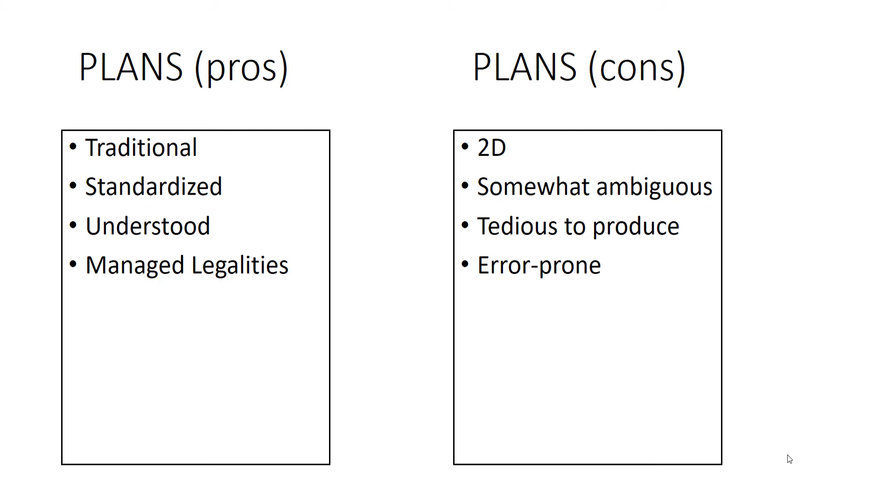The drawbacks of plans are they are two-dimensional. They do leave some ambiguity in place as far as what's to be done in certain specific areas. There's tedious and time-consuming work involved to produce construction drawings. There is the potential for errors to be made, moving between sheets, missing notes, missing call-outs, all the types of things that go along with it. But plans are, again, comfortable. They're tried and they're true, and we all know about them.

Models, on the other hand, are relatively new. We've begun to model things in three-dimensional space more commonly. It's becoming more commonplace. The pros on models: it's three-dimensional.

It really decreases, if not completely removes, ambiguity. Some of those details that happen between cross sections in a plan set, or in a high spot or a low spot, or some area on a grading plan become much more prominent, and we're able to see and evaluate those. It increases our spatial awareness.

We're able to see how things fit together. We're able to see how the drainage works with the roadway surface. We're able to see how the utilities under the ground interact with the footing of the bridge pier, all those types of things. And then another one I've put on here is the control of the design intent.

One of the things I thought of as I was thinking about this—a lot of times many of you may have been faced with this in terms of how things work. At least in my experience, contractors a lot of times will recreate three-dimensional model data from plans, which in turn sort of negates some of the design intent, potentially, in them reconstructing their model from your plans.

So being able to provide a model based strictly off of your design intent of what you intended to be built—that's important. The cons of models: the level of detail. We've all probably posed the question, well, what's in a model?

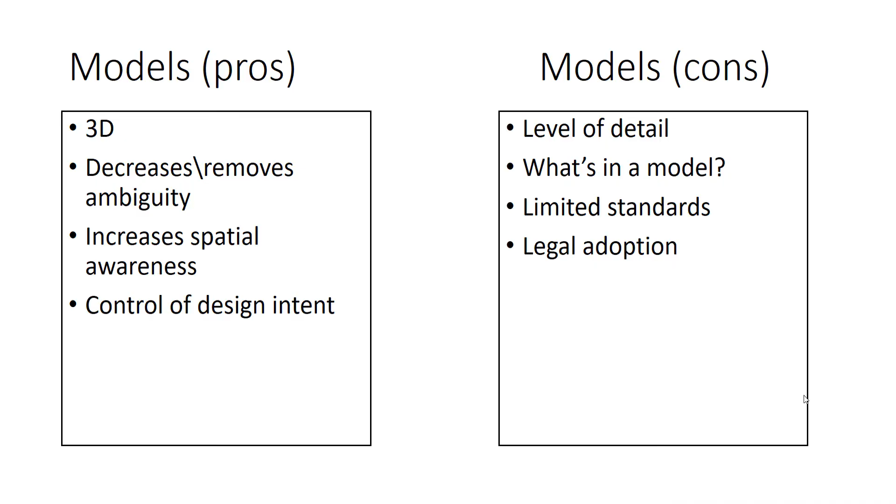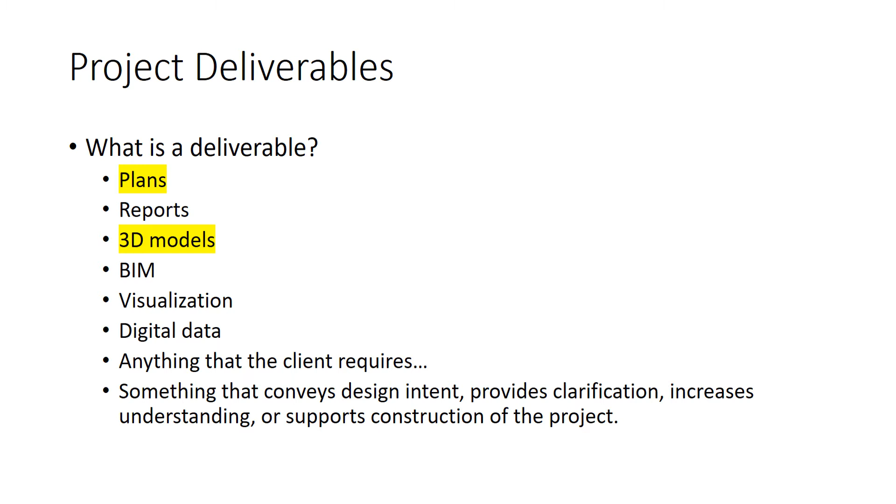We're focusing on plans and 3D models. But in terms of deliverables, it could simply be anything that the client requires. A deliverable could be considered anything that the client requires that conveys some design intent. It provides clarification of something on the project. It increases understanding of the project and supports construction. That's a deliverable. But in terms of this debate, what is your deliverable?

We're focusing on plans and three-dimensional models. Plans are our traditional default method for plan project delivery. They are understood, they are well known and comprehensible. Or is it three-dimensional models? Plans or models? What is your deliverable? And that may vary from project to project.

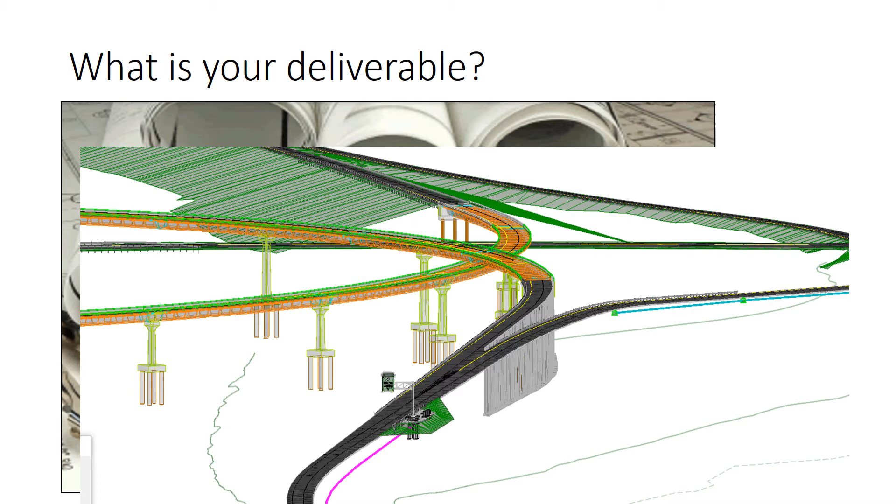Now, really the basis of this entire tech talk is, again, thinking about plans versus models. And I realized a while back that a lot of times our conversations, when we have discussions about plans and models, it tends to go one way or the other - either we're going to stick with plans and ignore models, or we're going to use models and forgo plans. As I began to consider that in reality, looking at this in light of what our objective is, to design and communicate our design most effectively, rather than thinking about plans or models, we really need to think about plans and models.

Because the constituency that we need to communicate with is broad and varied. We're all well aware that if you go to a public involvement meeting and try to display a set of construction drawings, a right-of-way map, whatever it may be, you have to explain that. So we need to produce deliverables, plans and models, so that we can satisfy a broader cross-section of people and interested parties. So in thinking about that, considering who are you talking to, I'm focusing here on the delivery aspect of our projects.

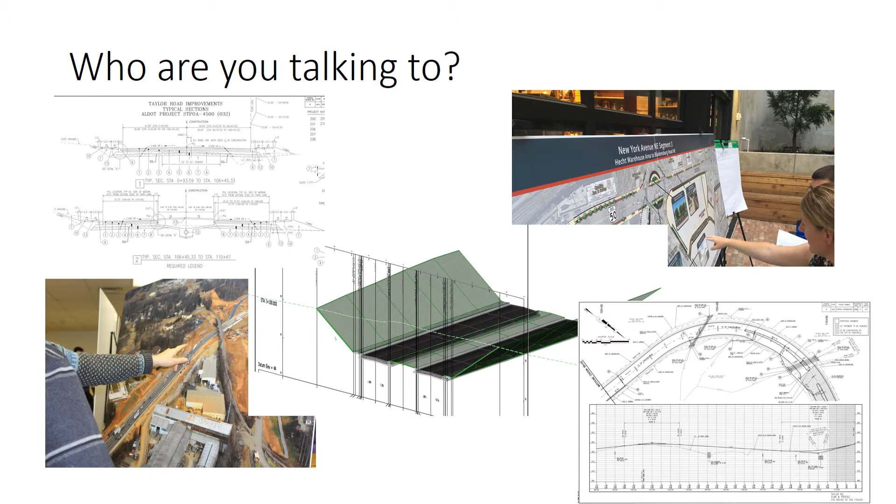Modeling, there's some legalities that need to be developed and created, but in terms of spatially defining things and clarifying what we mean to a broader set of parties, three-dimensional modeling allows us to do that. So when we think about who we're talking to, again, it's not just plans or models, it's really both to be most effective and efficient at communicating our design of the project to a broader set of people. So three-dimensional models enhance our ability to communicate and convey understanding, and ultimately this leads to the ability to enhance our delivery. And we're all focused on delivery.

But again, as we look at the changing environment in which we all do business, in which we all work, in which we all produce our projects, delivery of the project is key. That's our deadline, that's our focus. So being able to do that more rapidly, cheaper, faster, better, with less errors, that's important. That's the key. But the other side of this is, like I said, there's two issues.

There's the delivery of the project. How do we use plans to deliver the project? How do we use three-dimensional models in delivery of the project? What's the advantages of models in delivery? There's also the design side of this. In terms of looking at three-dimensional modeling, there's also benefits just in simply designing and creating and using a three-dimensional model within the design process.

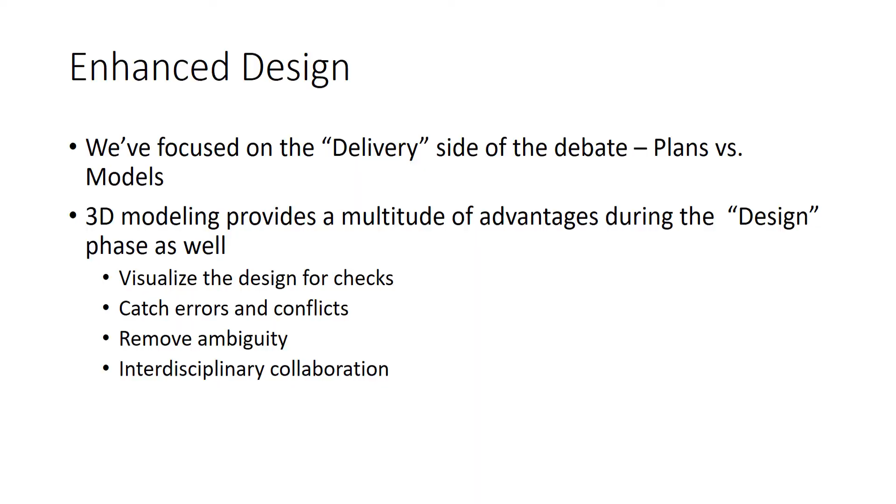So in terms of just thinking about the design, three-dimensional modeling, whether we talk about terrain models versus solid modeling, which we'll look at in OpenRoads Designer, provides a multitude of advantages during the design phase. Simply being able to visualize the design model, being able to collaborate between different disciplines, being able to see our existing utilities compared to our proposed drainage, compared to our roadway surface, compared to the box culvert at the creek at station 200+10, allows us to arrive at a better design, minimize errors, and remove ambiguity much faster in the design process. And that's kind of where OpenRoads Designer comes in.

And let me try to clarify where I'm coming from in thinking about our workflow and our processes. Again, in engineering, we design and we deliver. Well, in OpenRoads Designer, we wanted to increase the efficiency of those two things. What I wanted to point out here is that as you're modeling and designing, the model is being constructed continually. So rather than having a separate process of design, deliver, and having three-dimensional modeling as a separate entity that we have to post-process or some extra work, we want it to all be one, so that as we design, we are actually generating the deliverable three-dimensional model and the plans.

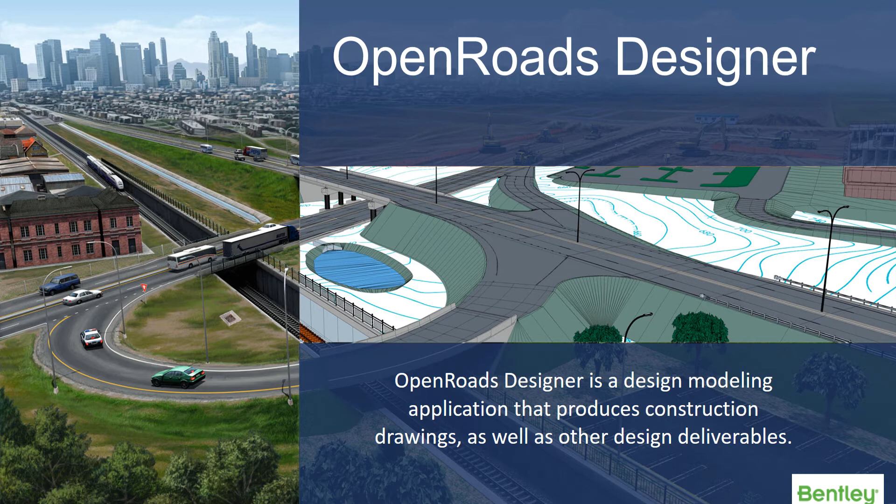So that efficiency, rather than being a multi-step process. And this is an interesting topic too: if you think about the things we've done in the past, we went through a lot of work creating terrain models, geometry files, templates, roadway corridors. How many files did we create, ultimately to generate the deliverable, which was drawings and some terrain model data? So again, OpenRoads Designer is intended to minimize that separation of files, separation of work, so that we blend design and the deliverable into one type of workflow.

So let's take a quick look. When it comes to OpenRoads Designer, if you haven't seen it before, it is a modeling application. It is intended to design and model in one comprehensive application. When it comes to plan production, and I'm showing you a cross-section image on the screen here, we provide tools named boundaries to actually provide windows into the design model. So rather than it being a secondary process to create some 3D data, then extract a picture of it and put it on a sheet, they are live, they are dynamic, they are intertwined.

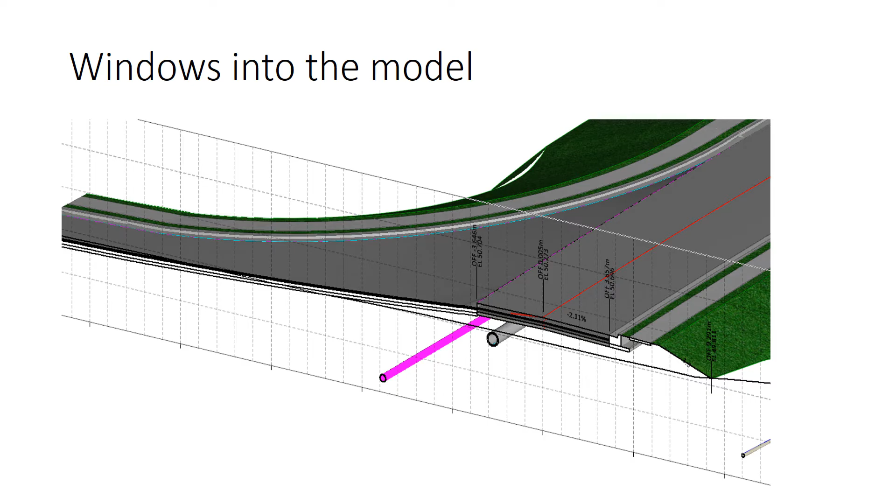Okay? In addition to that, again, marrying our workflows as a designer to produce both three-dimensional model data and plans in an integrated, more efficient workflow, we can look at civil cells as an example of technology included in OpenRoads Designer. You'll note here on the screen I've got just a typical detail of a sidewalk ramp, and then adjacent to that I've got the civil cell display.

So what this represents is a pre-built, predefined, parametric, constrained ramp constructed in 3 dimensions that follows the criteria specified on the detail sheet. So what you see in this example of a civil cell is the marrying of the data, the parameters, the specifications for that ramp into a 3-dimensional modeling element that we can store in a library and recall and use over and over again in a design.

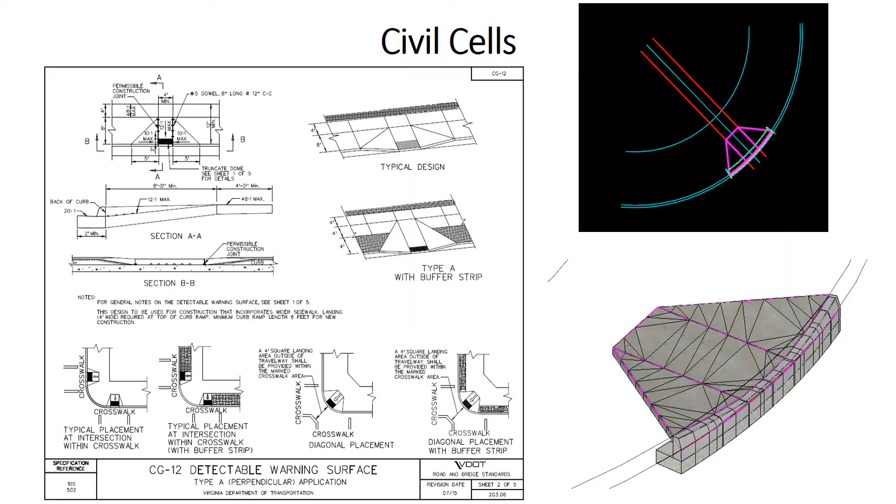Okay, I hope that makes sense. But again, it highlights the convergence of the plan specifications, which we've detailed out on the screen in the typical sheet we'd have, and the modeling element, which we'd use in our design model. All right, so let's take a look at OpenRoads Designer. So again, in context, thinking about designing and delivery.

So as we start here, I've got multiple views opened in OpenRoads Designer, and we're focusing first of all on just the modeling aspect. As I said before, when it comes to designing, being able to model quickly and efficiently is extremely beneficial, just simply to see what's going on. So what we're doing here, I'm just going to place a fire hydrant. I have an existing water line along the south side of the roadway, and I'm going to place a fire hydrant and tie into that existing water line.

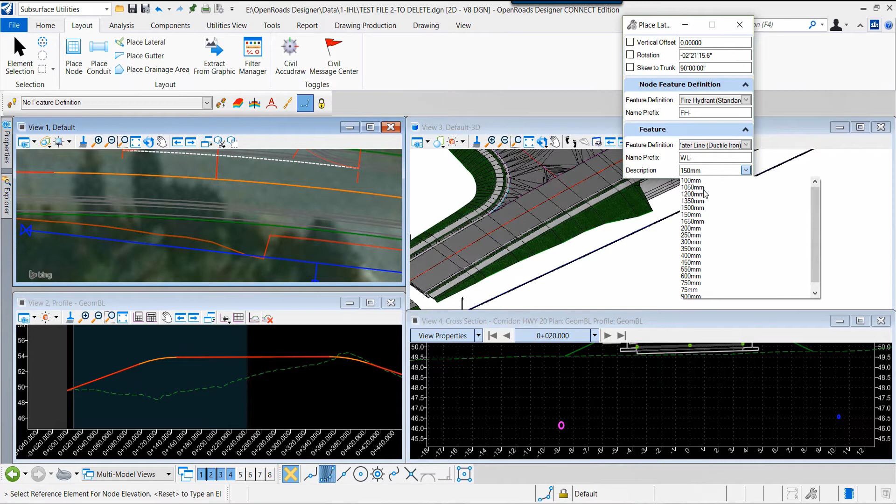Okay, so I'm going to go place a lateral. I'm going to select the feature definition that I want to use, which again is a fire hydrant. The feature definition basically defines what I'm modeling. And now I'm just going to tie that fire hydrant into an existing water line, which you see has just been referenced into my design model. You see it in the plan view on the left, and then you can see it in the 3-dimensional model view on the right.

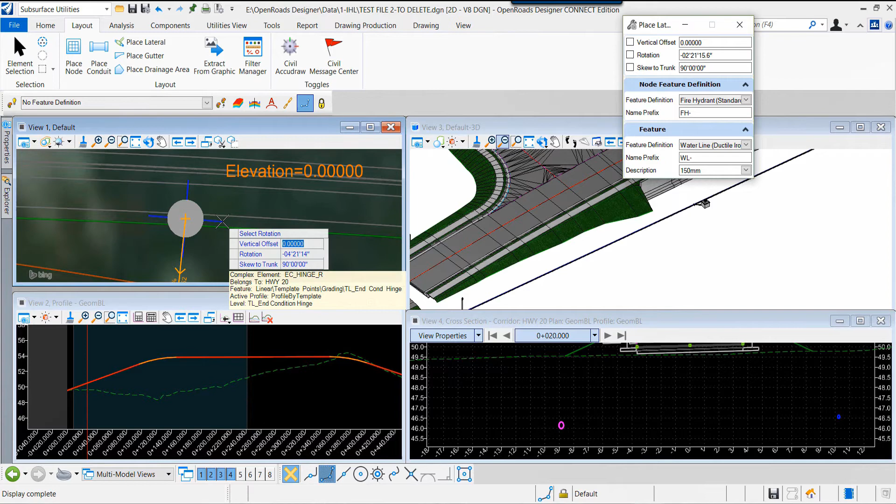So as I begin to place that fire hydrant, I'm actually going to place it in the 2D top view. Now I'm using sort of traditional methodology here in placing that element in the 2D view, but notice it's being constructed in the 3D view. And again, this really shows that convergence that we wanted to incorporate in OpenRoads Designer: work traditionally, produce 3D. So that 3-dimensional model is just there, it's inherent, it is part of what we're doing.

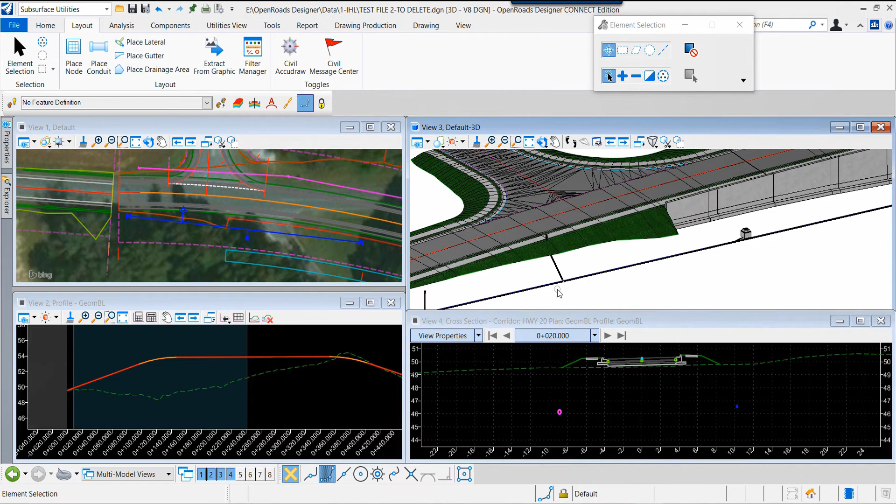So we've just placed a proposed fire hydrant onto our roadway model off of that existing water line, and we now see that in the model. There are cross-section views we can move through. On the screen, you see the plan view in the top left, the profile view in the bottom left, and the cross-section view in the lower right.

Now, let's go over in the top view. I'm going to just turn off the imagery. I was streaming imagery in from Bing Maps. That is a new addition for OpenRoads Designer Update 2. If you're not aware of it, you can stream imagery directly into your file if it has a coordinate system. So that's a cool addition that makes things a lot easier rather than searching for raster images and making sure they all line up properly.

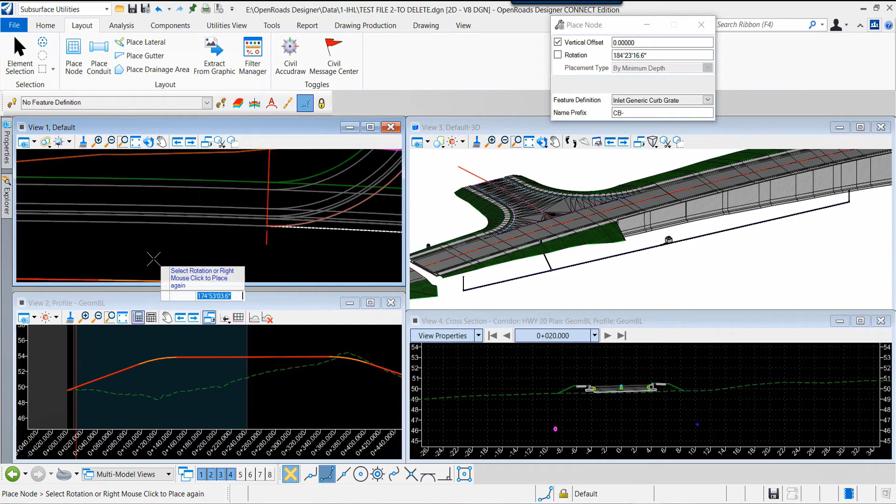So again, there's the plan view. Now let's lay out a little bit of a drainage network. So just as I did with the fire hydrant, I can go along the model and I'm just going to place some inlets. So I'll select the roadway corridor, the element that I want to use. Now, this is being integrated, so I'm placing a drainage network relative to my roadway. The elevation's being selected based off of the roadway corridor surface, which I selected.

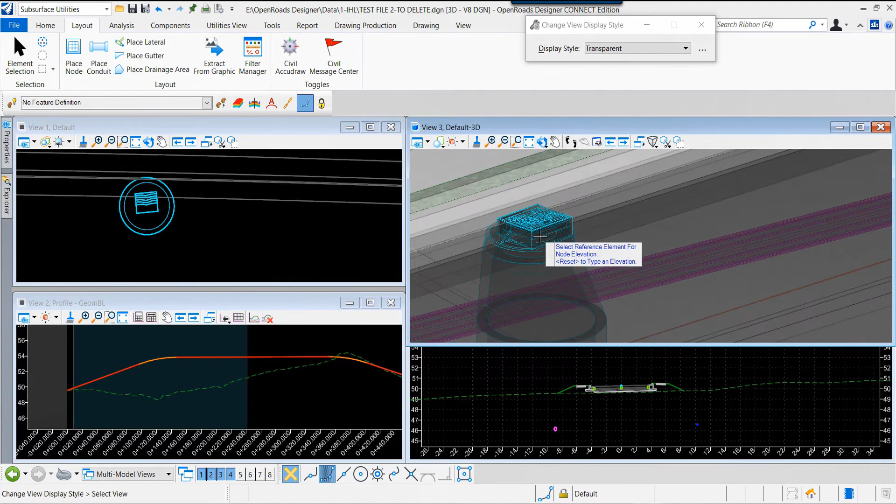Now, you can see that drainage network, and you're able to see the grate. I'm doing this sort of haphazardly here, just placing it in there kind of quickly. Now, I can change the view if I want to get a better perspective of the model itself. So we see the buildup of the roadway, the curb and gutter elements, and the drainage structure as well. So I can go through, place a couple more structures, rotate that structure, and we'll just pull that over. See the view now of that structure that was just created.

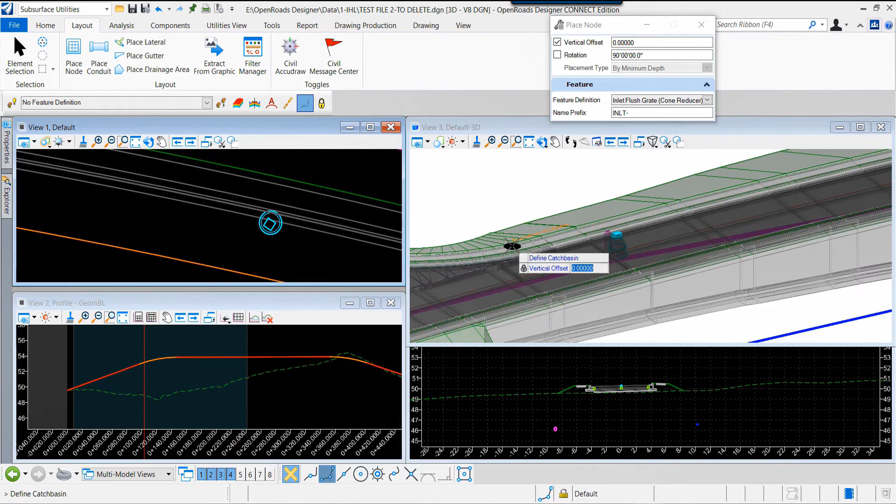We can modify that structure if we want to use a different type of structure. The feature definitions are completely customizable. The structures themselves are customizable. So based off the feature definition, you can place a three-dimensional structure defined however you want, whether it's rectangular structure, circular structure, different type of grate configurations, whatever that happens to be. All that's customizable, and you can construct whatever standard you need.

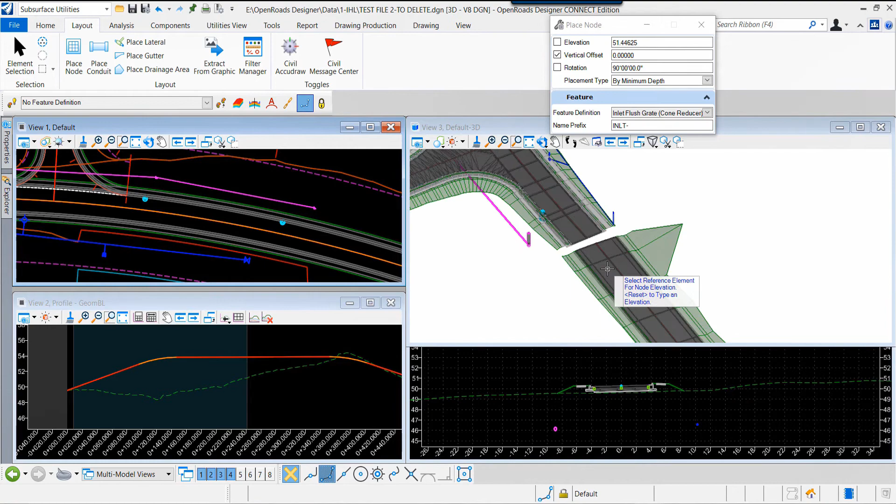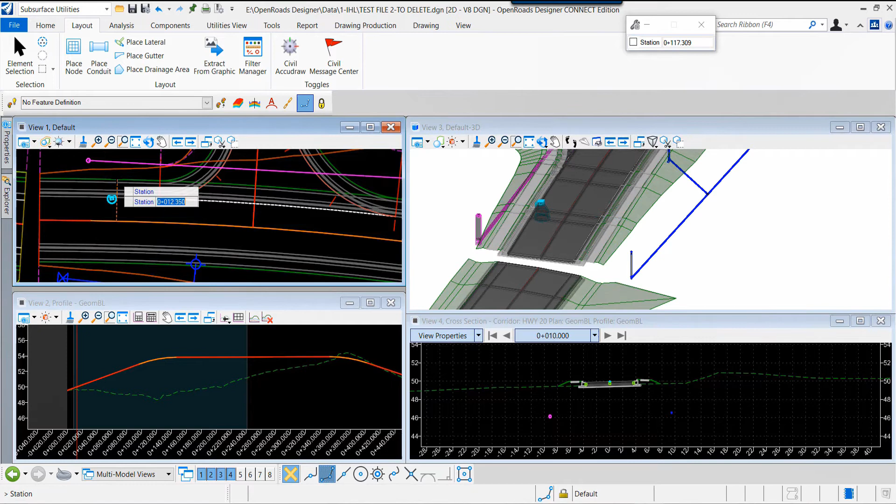Now, again, looking at this model, at this point, I'm thinking as a designer. At this point, as a designer, I see the intersection. I see existing utilities. There's a fiber optic line on the left-hand side of the roadway. There's a water line on the right-hand side. I can move through that and interpret that model in cross-section view. So I've got the ability to dynamically jump through those sections, again, as a designer to evaluate and see what my design is, how things are working.

Now we can just connect those structures up. We see those structures present in the dynamic section, and I can just take a look at that. Now we're going to place a pipe and just connect those structures. So we'll pick our pipe that we want to use. We're going to use a concrete pipe. Select the diameter that we want to use for this particular pipe, and then just select it within the model to connect the pipe, connect the inlets with the pipe.

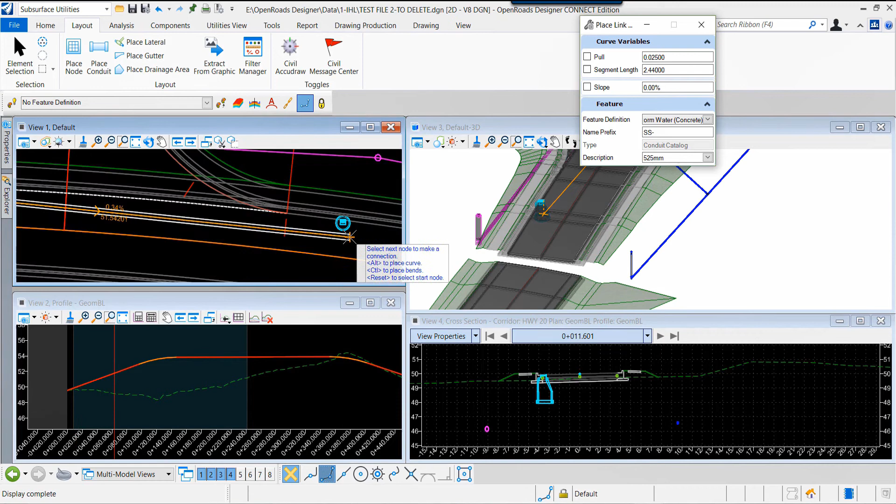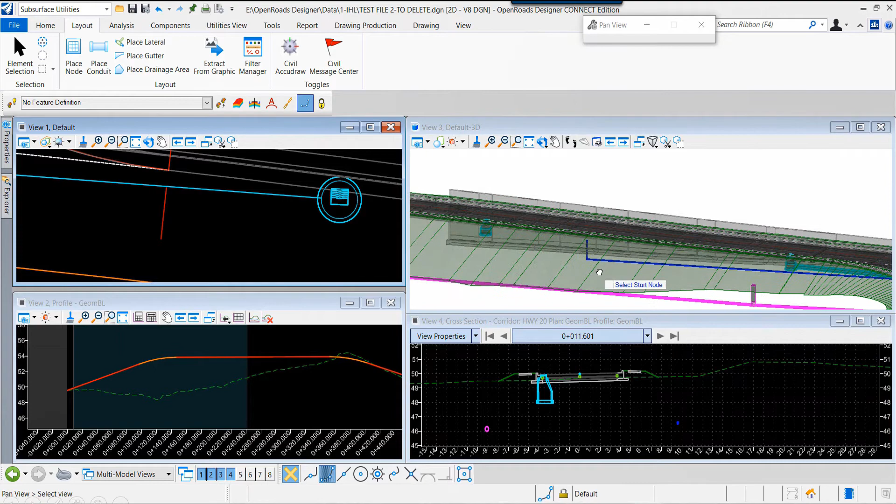So again, what we're focusing on here is just really the interactivity and the benefits of a three-dimensional model in terms of design. So we can see that pipe being laid out, again, drainage network relative to the roadway, relative to existing utilities, all in one comprehensive environment. Now, we're going to jump ahead just a little bit for time's sake and focus a little bit more on deliverables.

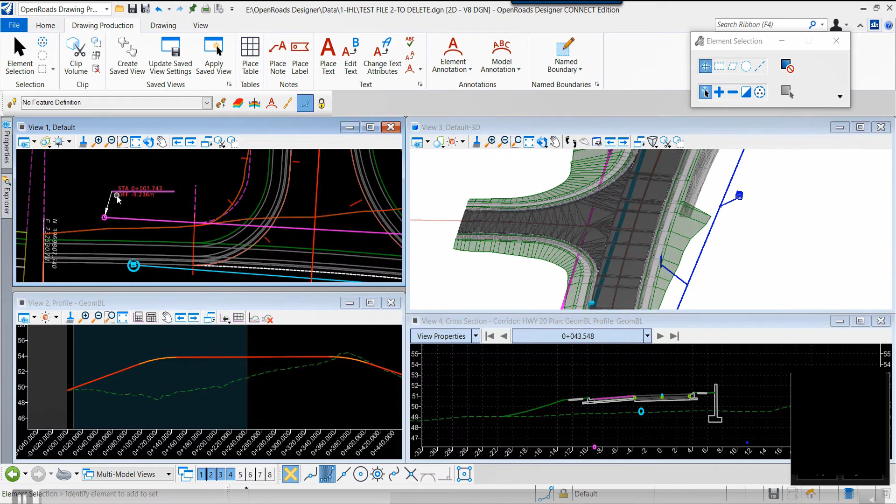Now, there are tools within OpenRoads Designer for annotation, for calling out stations and offsets, whether that annotation exists in plan, in a profile view, or in a cross-section view. So here, I'm just continuing on, placing a station and offset along that existing utility, and that text, that call out, is dynamic. If the roadway center line changed, it would update. It would all be dynamic. Now, let's jump forward just a little bit. So we've placed annotation into our model.

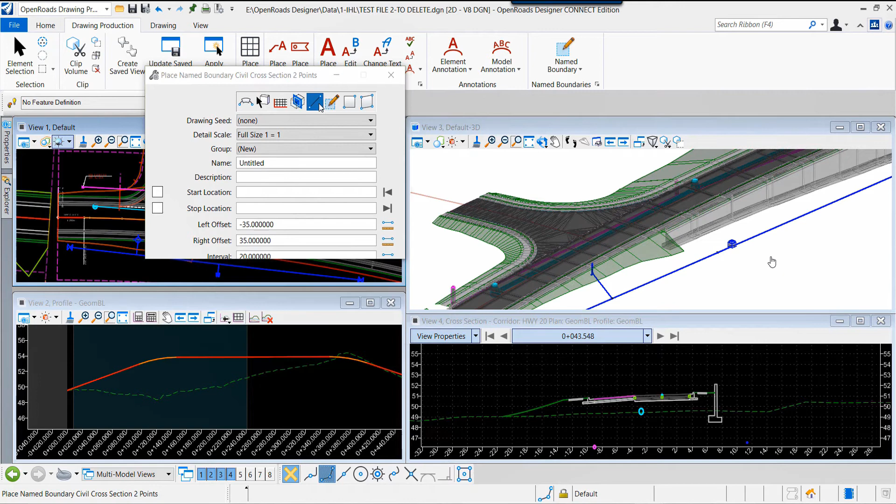Now let's look at producing a cross-section within the model. And so now, based off the design model in which we constructed our drainage, modeled our intersection, set the grade on our roadway, included a retaining wall, now we're going to move to producing a plan set. And I'm just going to create some custom cross-sections. These might be considered drainage sections or something. So I'm going to just place them across that roadway corridor using 2 points.

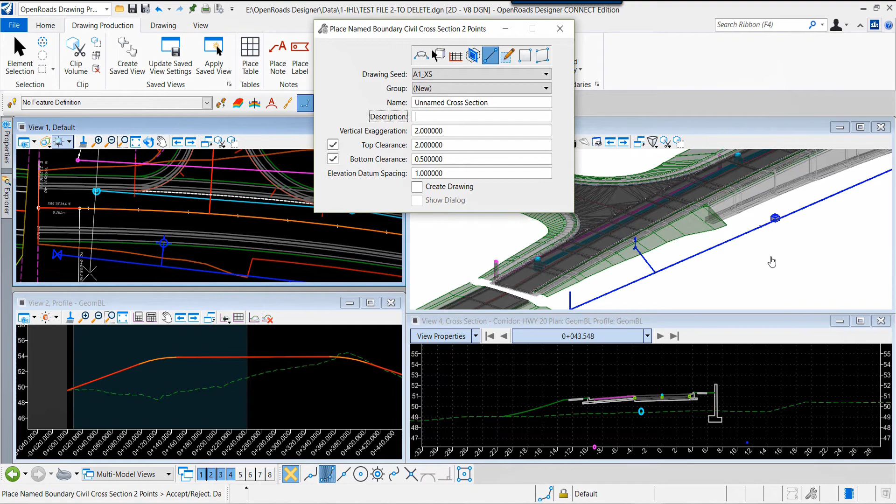So I'll select the drawing seed, which really controls my border, my standard behind the scenes as to how I'm going to build these sheets, and type in a name for the group that I'm creating. And at this point, I'm creating named boundaries. I'm creating the windows into the roadway model that will be the views, the slice of the model in my cross-section sheets. So I'm just going to quickly place a few of these throughout the model. And again, I'm just haphazardly placing these. These would be considered custom cross-sections.

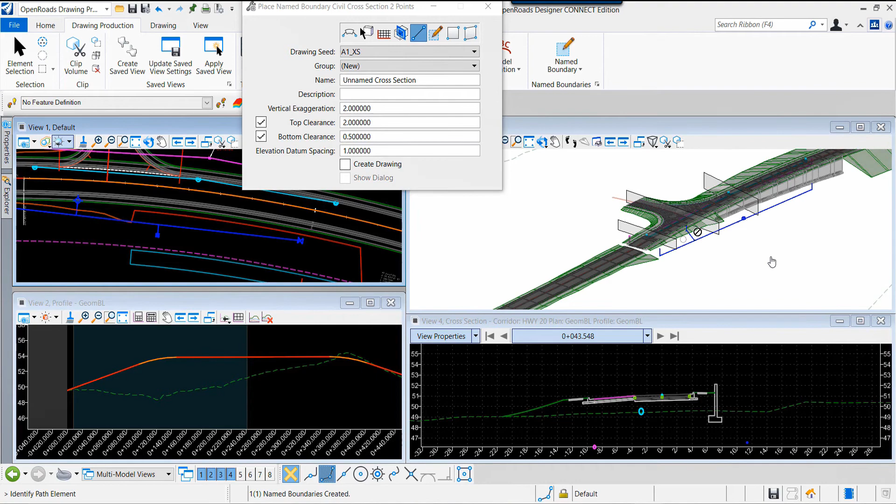So I've placed one at the first drainage structure. I'm going to go in and just place another along the intersection. Just select the alignment, and then I'll select the left and the right point, the extents of the cross-section that I want to create. And you can see those views, those windows over in the 3D model. Now I'll pick another area. Let's cut a cross-section and we'll skew it a little bit through the drainage structure, and then data point to accept it. Now there are our named boundaries into the model. So now we are looking at the plan delivery of our project based off the design model. And so now we have the cross sections.

You can see those displayed in the model. I can turn them on, I can turn them off. Again, these represent named boundaries, or I just call them simply windows into the model, and they will be placed onto a cross section sheet when we produce the drawings.

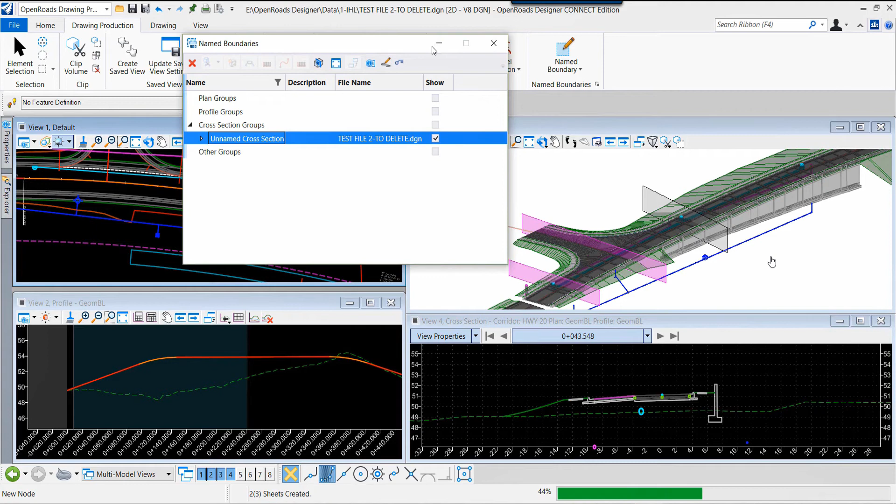So I'll open up again that set, and I'll just create the cross section drawings themselves. So now, again, I've only got a few. I'll end up with one sheet, but based off of those named boundaries, based off the model data which it's cutting through, that produces my drawings.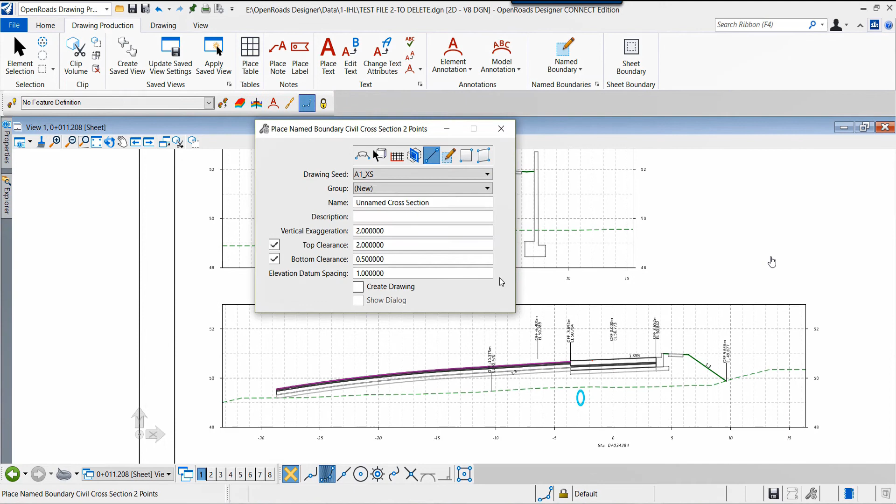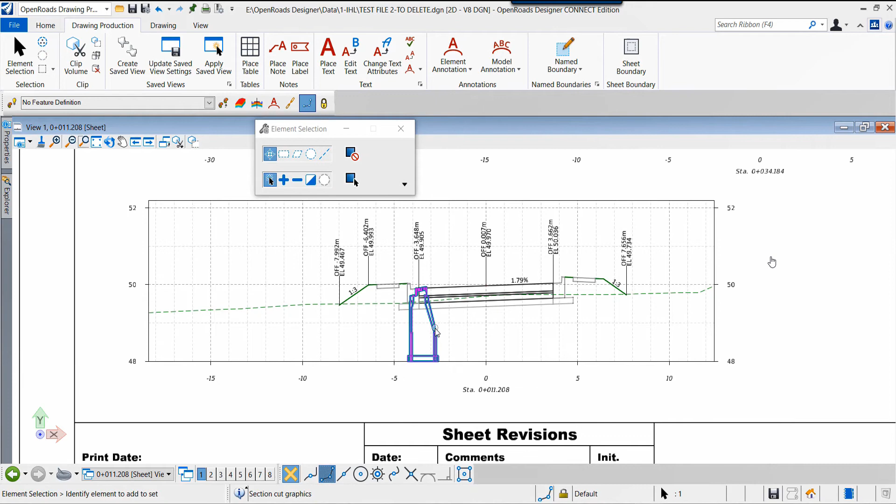So we see the cross-section sheets now on the screen. You see the drainage structures in place. See the pavement layers. So there's the one drainage structure. We can look at the properties of it. Again, this represents a three-dimensional entity in the model, and we're looking at a view of it in our cross-sections.

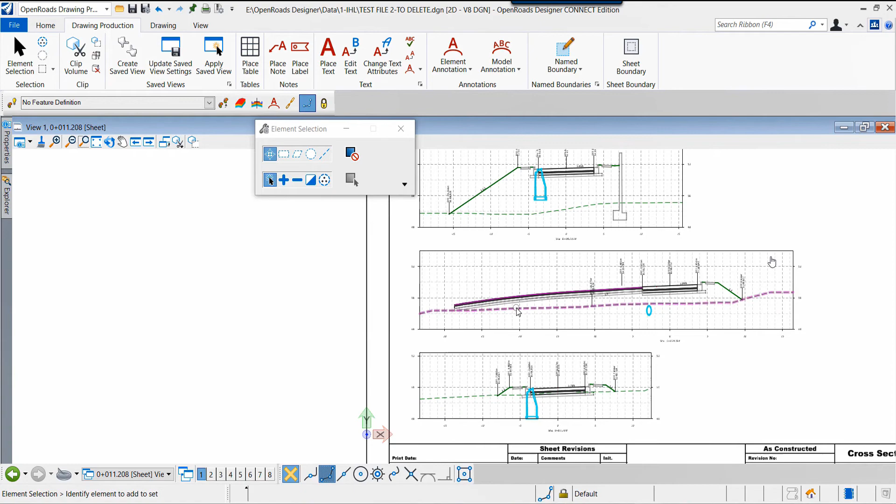So we've got the three sections created now. There's our intersection as defined. And then finally we have the last cross-section. And now the interconnectivity of plans and models. I can jump from this particular drawing into the design model. So from the drawing, I can jump into the design model.

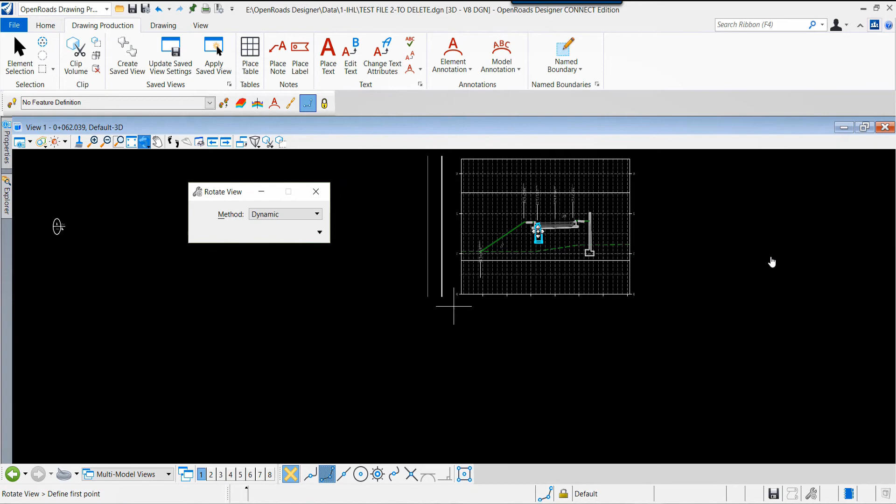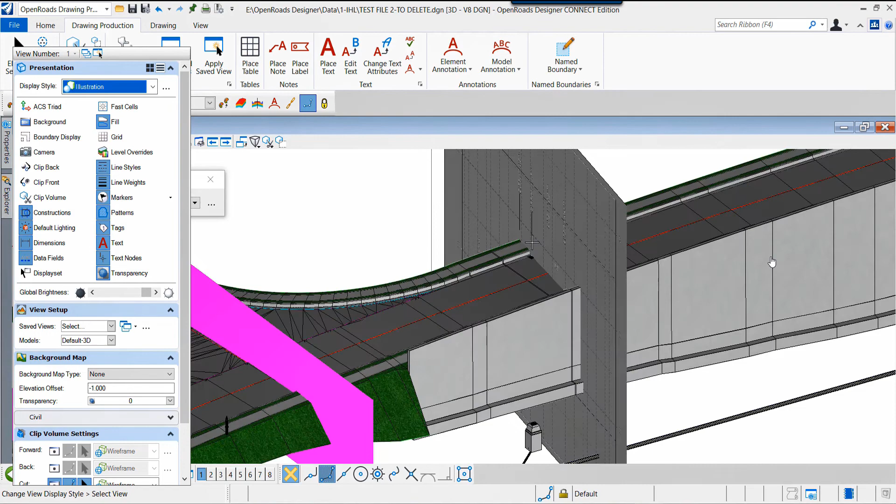So here we see that sheet based off of, again, the representation it sliced through in the design model. And I can just turn off the clip volume, and we can see the relationship of that sheet to the design model itself. Now again, I think it's extremely cool to be able to jump from the drawing to the model, or from the model to the drawing for that matter. Again, ultimately increasing efficiency, whether we're delivering plans or whether we're delivering models.

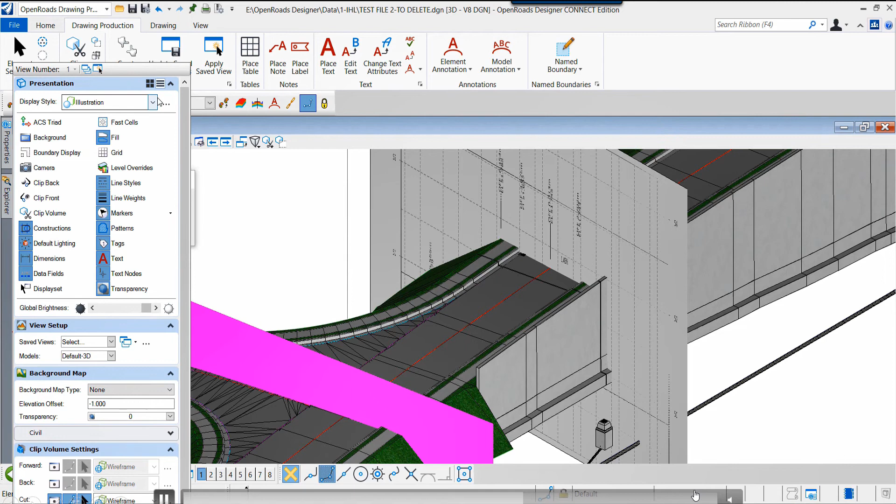And so there you see the cross-section in relationship to the design model itself, just put together in the model view so that we can see it nice and neatly. We can change the view if we need to modify and change things around. Change the display parameters to transparent if we want to see things in a different way.

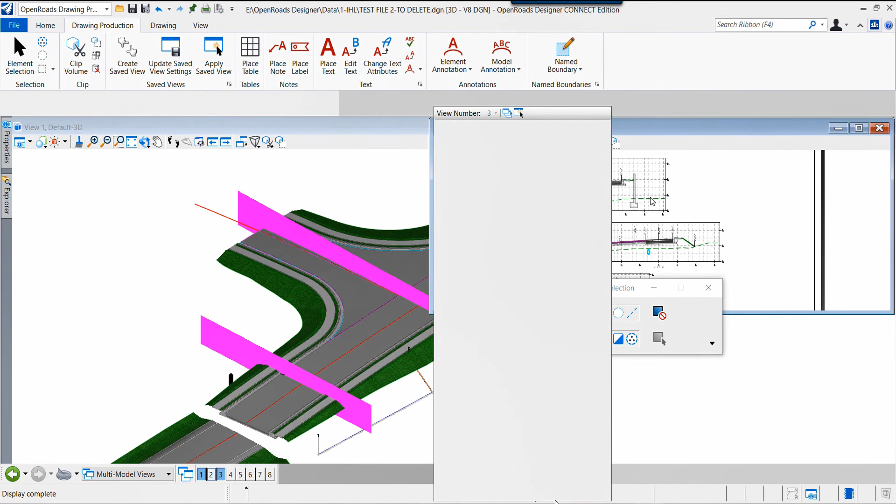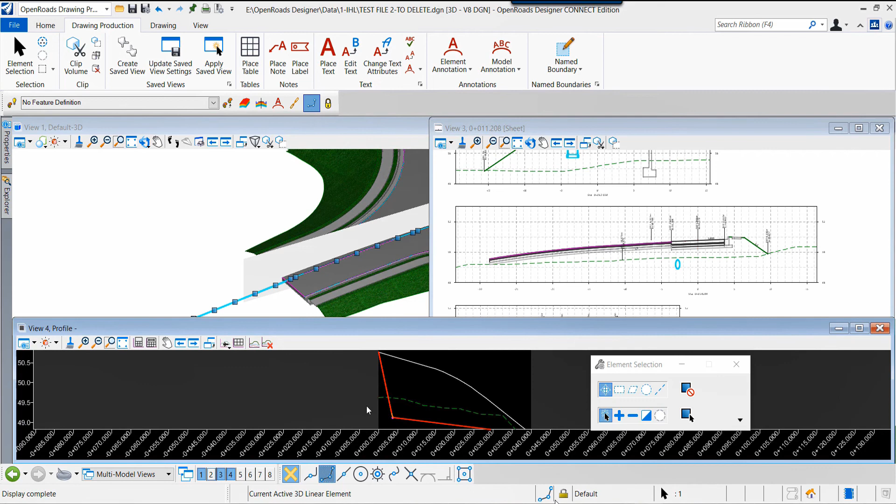Now, in addition to coupling designing, modeling, and plan production, if we look specifically at the cross-section at the intersection, I've opened that sheet up independently in a separate view. And now if we go and modify the profile of that intersection, what's going to happen to the cross-section representing that design model? So I've opened up the design profile.

I have the 3D view opened in the top left, the actual sheet view opened in the top right. So if we modify now the profile of the intersection as it relates to where we are currently. So let's pick it up, let's change the profile, and now watch what happens in the model and in the plan sheet. So watch the cross-section, watch the model.

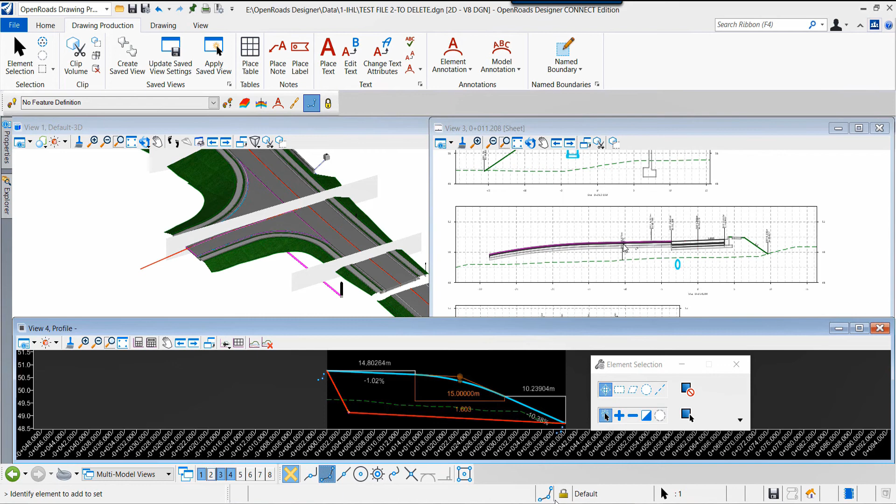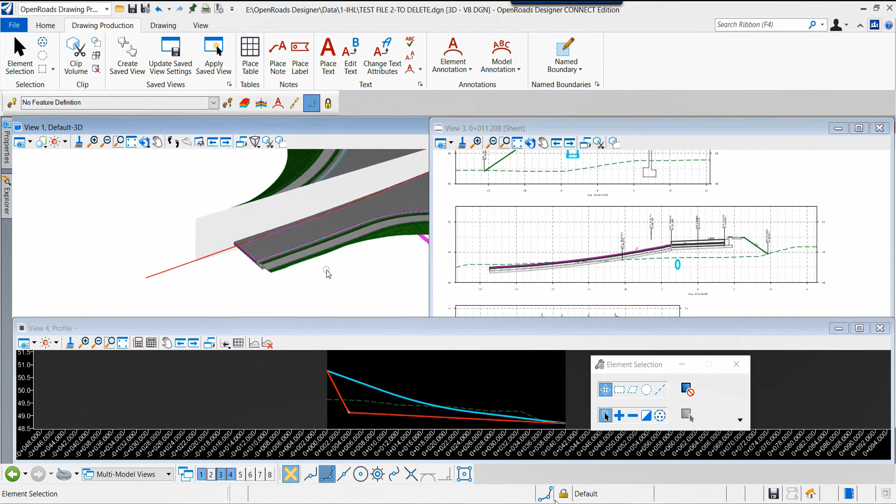So now those updates, since it's based strictly off the model, are applied throughout. And again, that cross-section, if we make another quick modification, notice it updates based off of what we do in the design model. So again, model and design and impact deliverables at the same time. Ultimately trying to increase efficiency, streamline the process, and move at a more rapid pace.

So we've got just a little bit more time. I'll highlight here just a couple of things from a tech preview. Thinking about OpenRoads Designer and again coupling modeling and delivering our projects, what you're seeing on the screen is a tech preview. It is available in Update 2, although not fully enhanced as it will be in our next release.

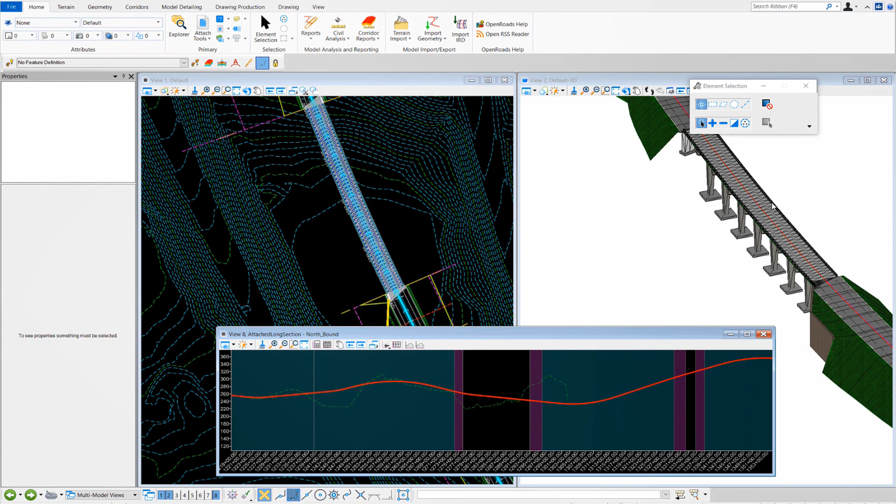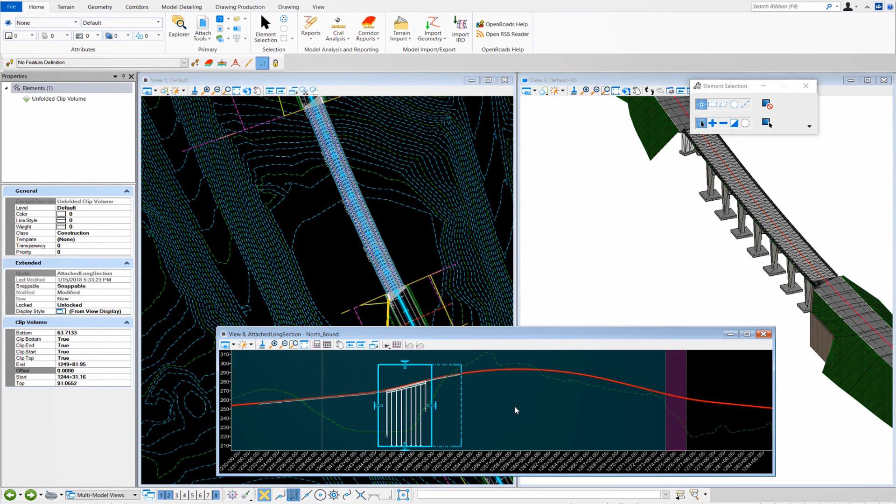But what you're seeing is basically the ability to open a profile view, select a window, and then display the three-dimensional model data into that profile view. So we're able to take the profile view, clip out, place a window, and say, I want to see the three-dimensional model data along that profile in my profile window. So again, it's really given us a way to marry plan production and modeling into one cohesive workflow.

So now, if we take that step farther and we want to apply this to sheets, we have the same alignment, same roadway corridor. We have a boundary created in the profile view, and this would be a boundary we've created for a plan and profile sheet, for example.

Now I'm going to use the same tool. I'm going to define my window based off of that named boundary data point, and again we see the three-dimensional elements in the profile based off of the selection. I can modify the extents if I want to shorten it or widen it so I see model data along a different station range.

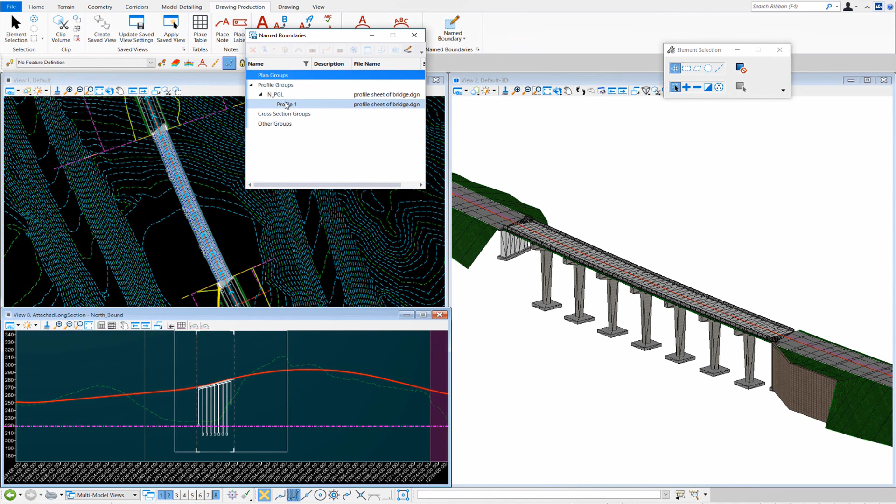Then we can move up to the named boundary tool and actually look at the results in the sheets. So now we've got the boundary created, and we're just going to create a drawing from it. You see that the interpretation of the 3D model data in the dynamic profile and in the boundary we're using on our sheet is carried forward into the plan production.

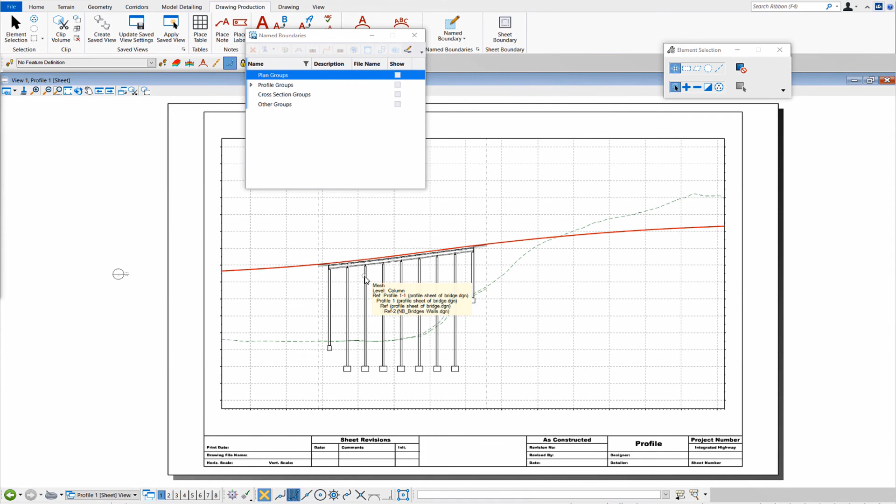So ultimately it is simply to marry the workflows between design and delivery in order to make the debate between plans and models much more seamless.

So what's the point? We started out talking about the great debate, plans versus models. As we've talked about it, discussed it, and I thought about it, looking at it practically speaking, is it plans or models? It really becomes, I think, plans and models. If our objective is to deliver projects more effectively and efficiently, then ultimately we are going to need to deliver plans and models.

Every project will be different. There will be different requirements on each project, different standards we need to adhere to, different needs. So we should begin to think about, rather than plans versus models, plans and models.

We need to be thinking about that in light of some of the delivery methods becoming more commonplace. Think about design-build delivery methods, or CMGC, where collaboration is key and we need to share data quickly and efficiently in both plans and three-dimensional space. Being able to produce plans and models and share that data more collaboratively is extremely important.